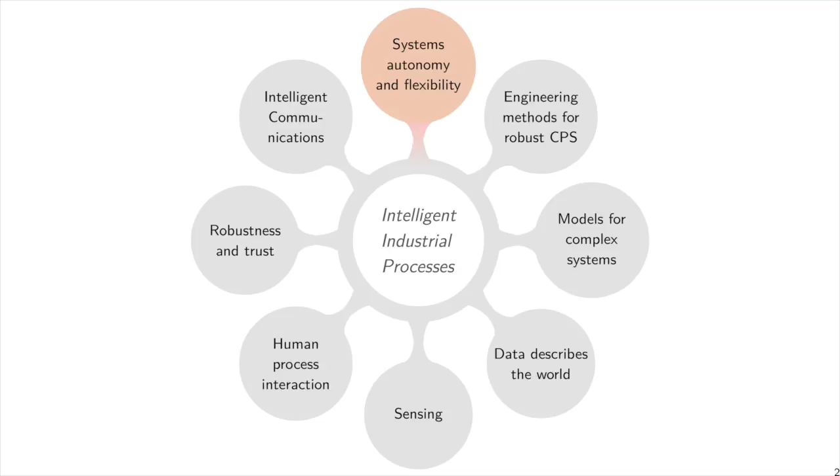Before I start, I would like to say that our system autonomy and flexibility theme is part of the larger theme at LTU, which is intelligent industrial processes. It's a theme working on connecting different aspects of daily life to improve the technology in industrial processes, to provide more robust, more secure, better and efficient industrial processes. The intelligent industrial processes, or as we call it, IIP, is itself part of a larger area of excellence at LTU in research and innovation, which has many parts and sub-themes, as you can see here.

Why do we need autonomous and flexible systems? Because in current life, things have become much more complicated. We have different systems, with a lot of intelligence distributed over them. We have smart cars, smartphones, a lot of things with intelligence built in. Our objective is how we can make all these components operate and work together for a better life. If we consider these complex systems interconnected all together, how can we bring a better understanding for human beings to get maximum benefit from these tools?

So what we are doing here, we mainly exploit the complexity of these things. These complex systems are getting more and more complex, and for that reason we need to be able to handle this complexity. This type of complexity is very difficult for humankind to understand or to integrate all together. So for that reason we have the autonomous and flexible system theme. Its focus is that systems can learn from operators. We need a methodology so that systems can operate and interact with each other and discover how they can operate in a better and more efficient way.

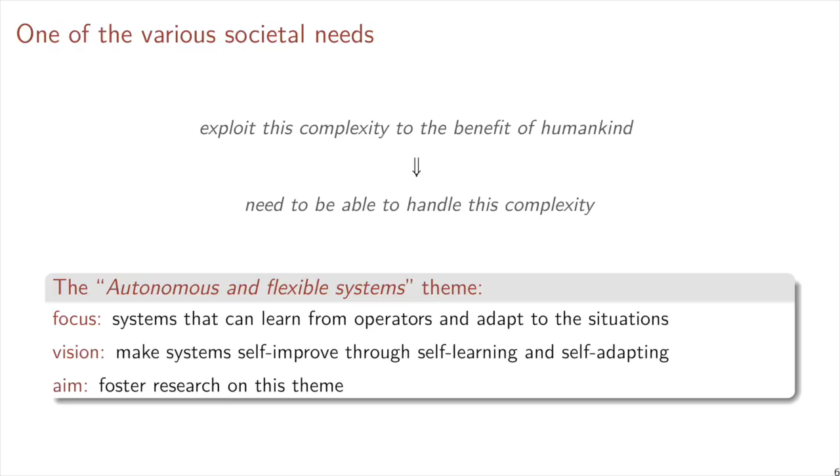The vision is that we don't need any human in the loop. That's our vision in the AutoFlex project. We need everything to be automated, and flexible when something is missing, something new is added, or new things arise. The aim is mainly to foster research on this theme. Now, I will hand the stage to Professor Cervantes to start presenting the main theme, which is called wide operating range of hydraulic turbines. Okay, thank you, Khalid.

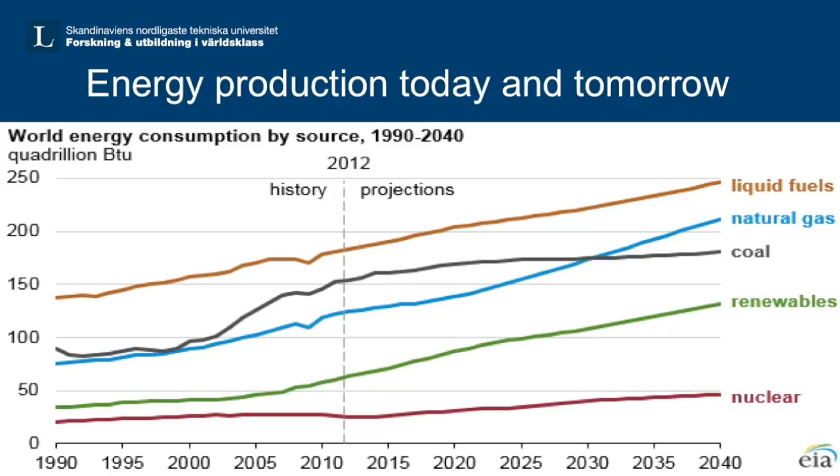If we look at 2012, you see liquid fuel, natural gas, and coal are widely used today. Renewable energy is one of the solutions instead of using such fossil fuels, and it's going to increase quite a lot. Today the main source of renewable energy is hydropower, which stands for about 71% of renewable energy.

Which type of renewable energy are we going to use in the future? Mainly wind and solar energy. Solar energy's price is decreasing very rapidly, and it's the same for wind. Today, in 60 countries around the world, solar energy is the cheapest energy you can get, cheaper than fossil fuel. In Sweden, solar energy is perhaps not widely used, but wind energy is increasing and getting momentum, and at times we get 10% of electricity production from wind.

Solar and wind have exponential growth. Here you can see, from 2000 to 2013, how the accumulated power for solar is increasing, and also for wind. This trend is going to keep increasing.

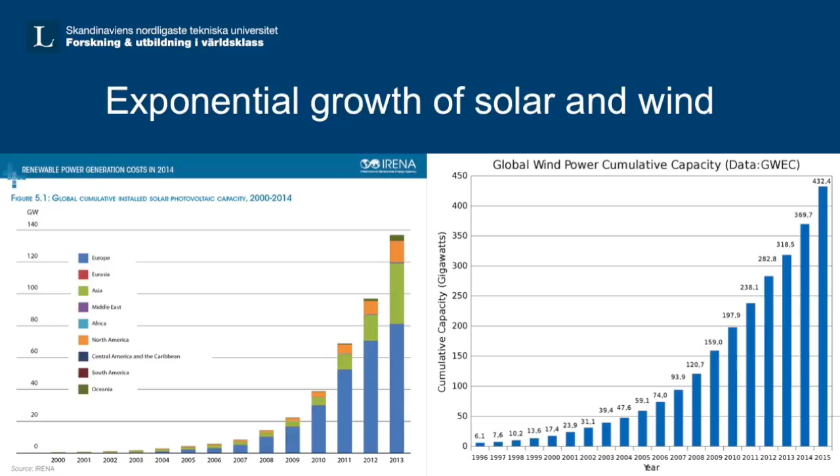One of the main problems with solar and wind is intermittent energy. If clouds appear, your solar panels won't produce electricity. If the wind stops blowing, you won't produce electricity. This means your system needs some backup able to respond to such variation due to the weather.

In Europe, one way to see the quality of electricity: we have production and demand, and we should have a frequency of about 50 Hertz, within a certain range. Here you can see some perturbation on the Swedish grid, where the frequency decreased really quickly. After that, you need to start some machine to regulate it.

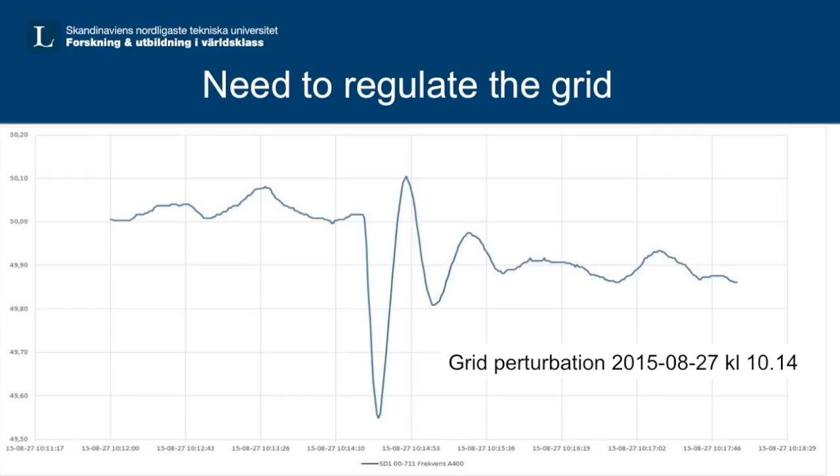In Sweden we are really lucky because we have a lot of hydropower. About 40 to 50% of electricity production is hydropower, and we think that in the future hydropower is going to have an increasing role, used more and more for regulation. Using hydropower to compensate for grid fluctuations due to renewable energy like solar and wind is an opportunity, because there's a large amount of hydropower already built in the world.

As I said, it's the largest renewable energy in the world, about 70%. In Sweden it's about 40 to 50% of electricity production. Here in Lulea, the Lulea River stands for about 10% of the total electricity production in Sweden.

Some words about hydropower and how it works. Usually you have a dam, which allows you to stock water and build a reservoir, like a battery. When you need energy, you use water which goes through the penstock and arrives at the turbine. The turbine is coupled to a generator with a shaft, putting the generator in motion to produce electricity. After that, the water leaves the turbine.

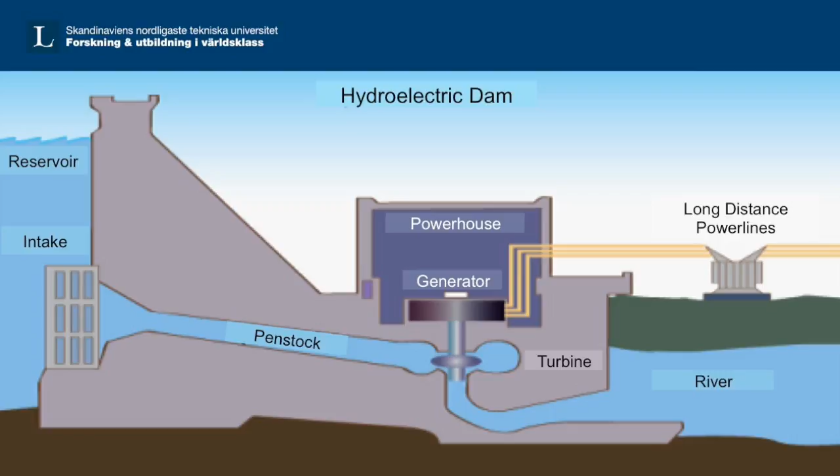Hydropower has been built and developed for many years. Today, hydropower is one of the most efficient ways to produce electricity. The efficiency of large hydraulic turbines is about 97%, and you have really large machines able to produce up to 700 megawatts of power.

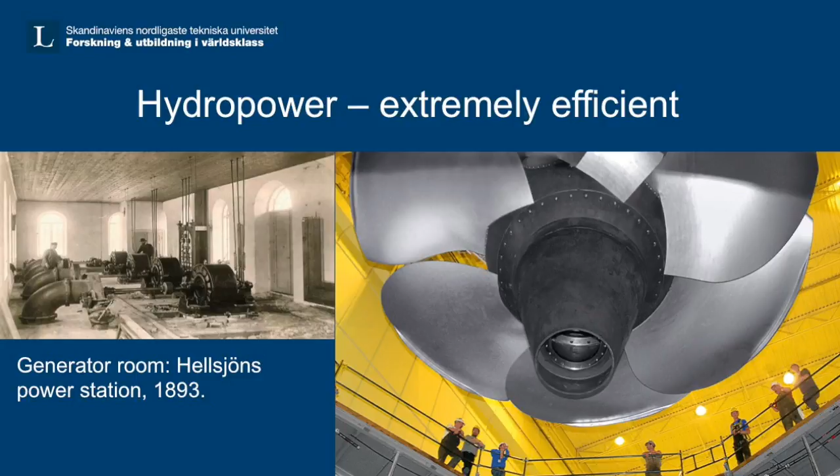Such machines have really large efficiency, but they are mainly built to operate at steady state, meaning they work with a given flow rate and give really good efficiency. As soon as we move away from this flow rate, the efficiency decreases and certain flow phenomena appear.

If we look at the introduction of renewable energy, like solar and wind, this creates perturbation on the grid. It means you are going to use your hydraulic turbines more often at part load or high load, and start and stop them more often. So you are using such machines away from the best efficiency, for which they are not really built.

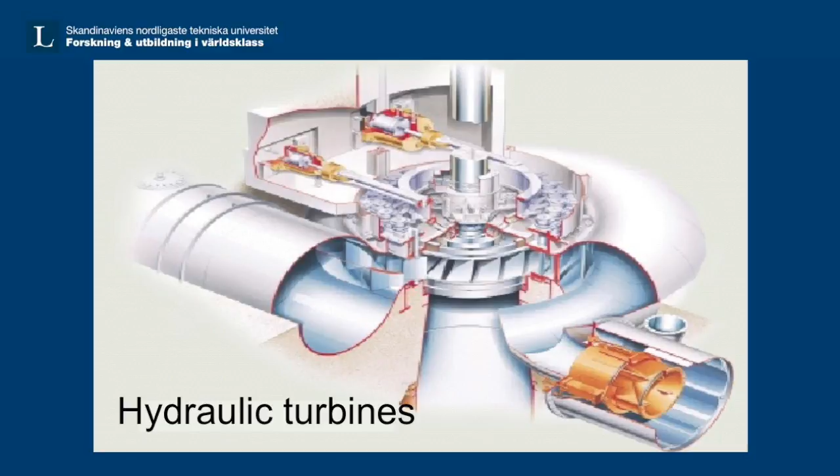The flow coming to the runner has a certain rotation, and after it leaves the runner. When you run the turbine at the best efficiency, the design point, the flow leaves the runner with a nice straight direction. When you move away from the best efficiency, some rotation is left at the outlet of your runner. This rotation in the fluid creates specific flow phenomena which generate pressure pulsation, which are not so beneficial for the machine.

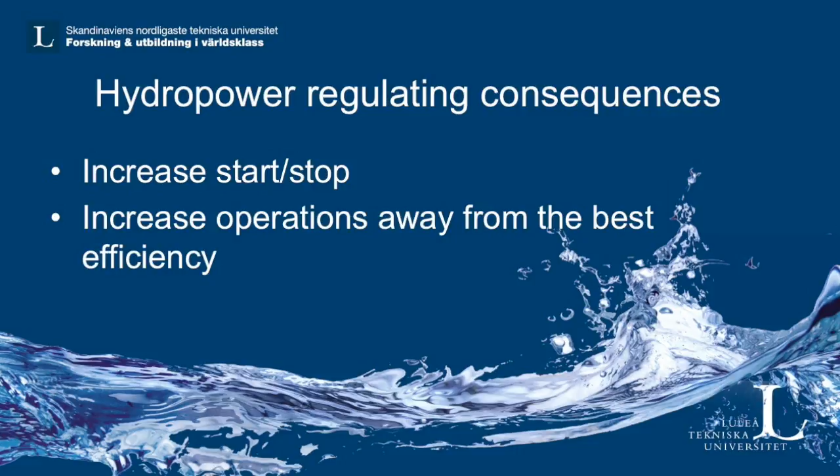If we use hydropower to regulate the grid, we increase the number of starts and stops, and we also increase the operation away from the best efficiency — so it's part load and high load.

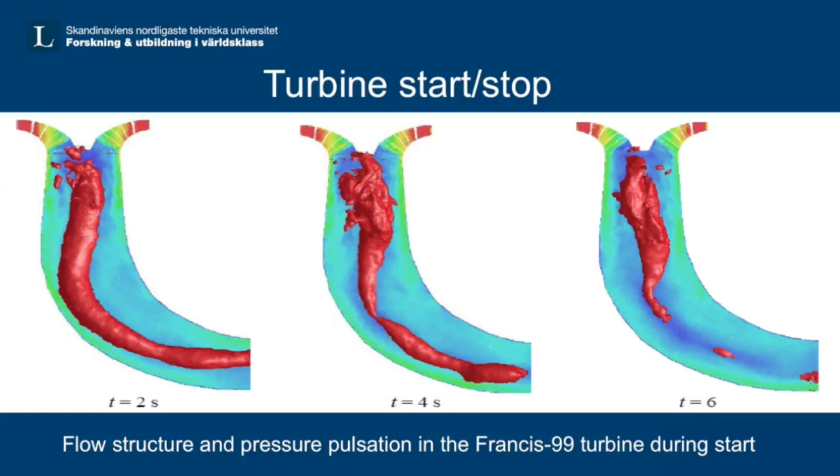If we look a little more in detail at what's happening in the machine when we start it, we see a large vortex developing just below the runner. It's like a snake, and this creates large fluctuation in the flow and vibration of the machine, which is extremely detrimental to the life of the machine itself.

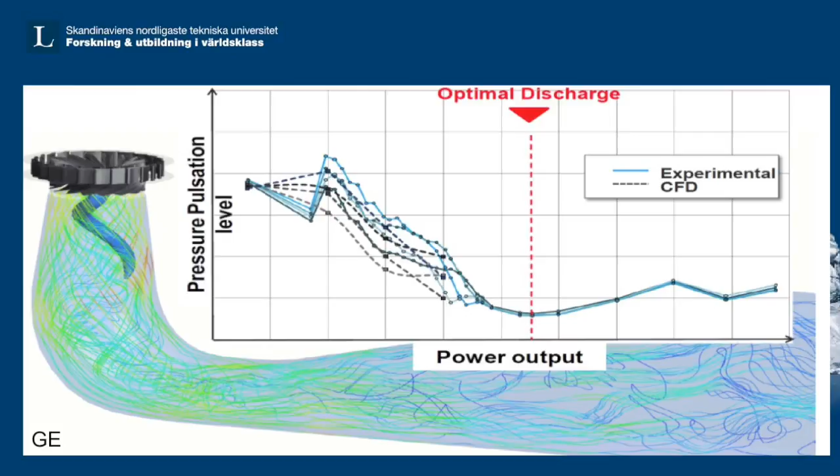There is a flow phenomenon which appears, known as vortex breakdown. When you increase the flow rate, pressure pulsation also starts to increase. All these pressure pulsations are due to the residual swirl, the rotation left in the liquid leaving the runner.

Now I'm going to show you some very nice pictures of what's happening. To the left, we see what's called a rotating vortex rope. In this case, the pressure is lowered, so we can visualize this vortex rope like a snake. It's low pressure, and you get some cavitation there. Just to the top, you have the runner.

This vortex rope is rotating, creating some circumferential pressure pulsation, but also some axial pressure pulsation, so it creates a lot of vibration. Such a vortex rope means some turbines cannot operate below perhaps 70% of the best flow rate. And when you go to higher flow rate, you get another type of vortex breakdown, which may create surge, so all the water in the complete water channel starts to oscillate.

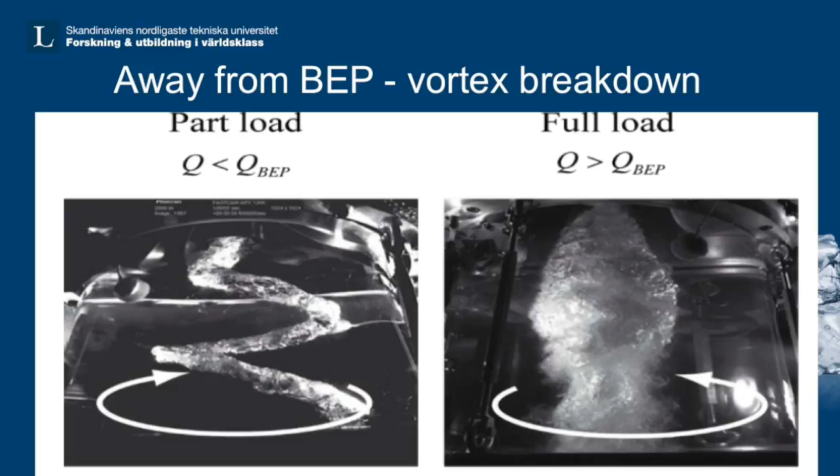This problem isn't really new. It's known since decades, dated even from the 1940s. There are papers talking about the Rheingans frequency, and a lot of measures have been tested, putting fins inside the draft tube, among other alternatives.

The one which is widely used is air injection. Here you can see a drawing of air injection on a machine in Romania. They have some tubes and they inject air inside the draft tube. The main idea is to decrease the pressure pulsation, the amplitude of the pressure pulsation in such type of machine.

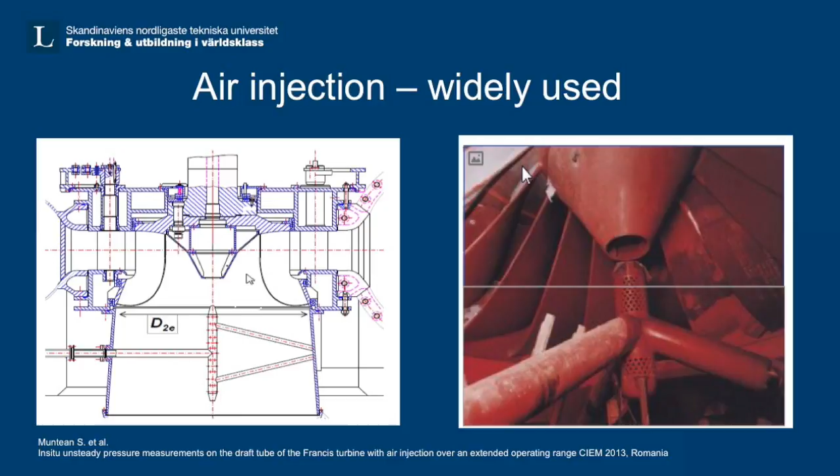There is some other way to inject air. It can be through the shaft itself also, so you don't have to have an element inside the draft tube.

Unfortunately, air injection is not always successful. Here you can see amplitude as a function of the frequency of this rotating vortex rope. What you need to focus on is the amplitude. In the figure on the left, you see an amplitude of about 0.5, due to the pressure pulsation of this vortex rope, and you want to decrease this amplitude.

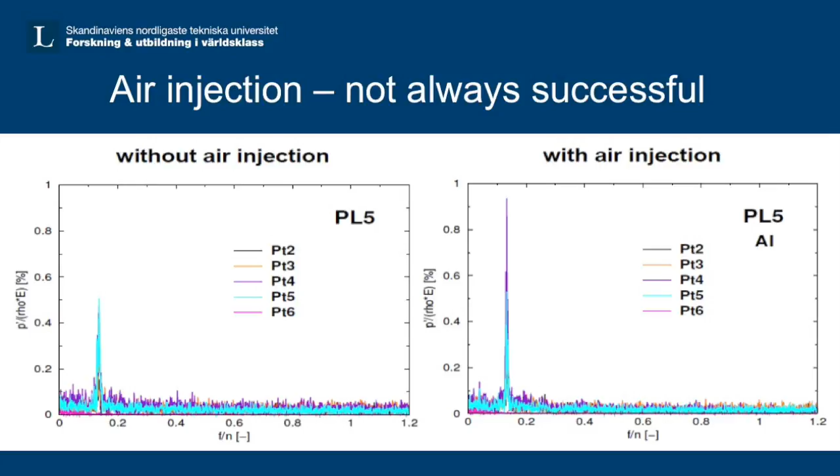So you inject some air, and in fact you can see that the peak increases to 0.9. What I want to point out is that air injection is not always a successful method to decrease the pressure pulsation of a rotating vortex rope in a draft tube.

This phenomenon which appears is the vortex breakdown, and it's something studied quite a lot by people working in fluid mechanics. If you look in the literature, you may find different types of vortex breakdown: the bubble form, the spiral tail form, and the spiral filament form. The bubble form is better for us, we get less pressure pulsation, so it's something we want to move towards.

There are different theories about the vortex breakdown, but there is no consensus. Some say it's a wave phenomenon, some say it's a 3D separation, some others lean towards instability, and some people are mixing these different theories.

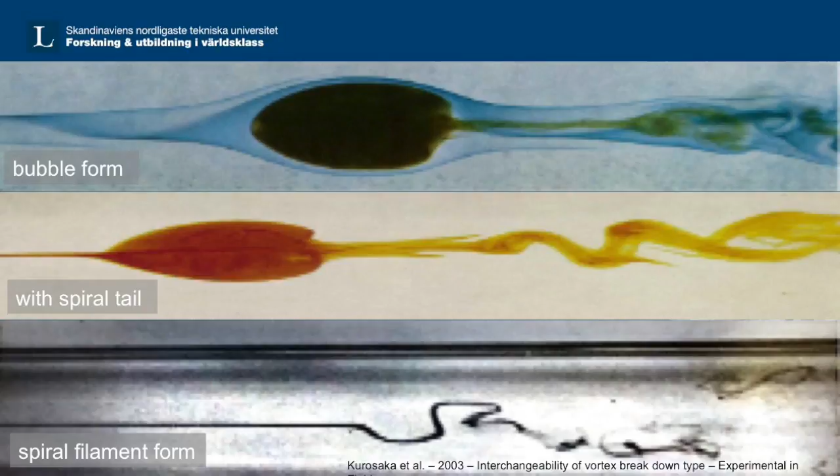One researcher investigated this vortex breakdown and created perturbations to move from one type of vortex to another. He was able to move from the spiral filament vortex to the bubble vortex breakdown, which is exactly what we'd like to do in hydraulic turbines—get rid of this spiral vortex, this rotating vortex rope. He did experiments by creating this type of circumferential perturbation.

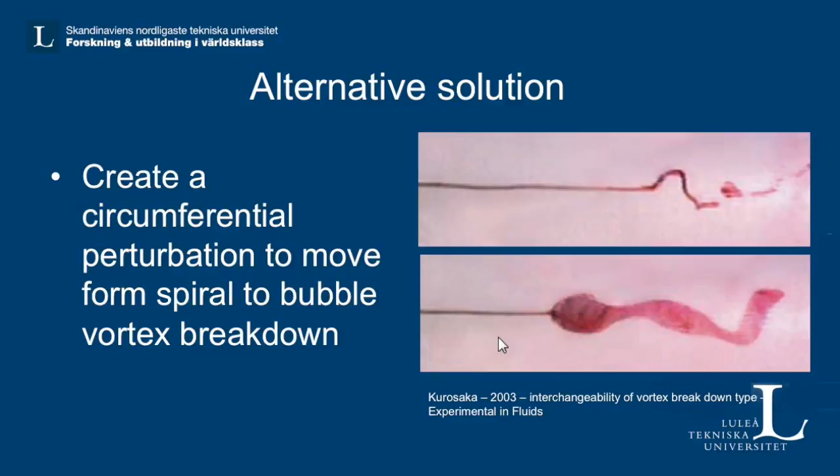The project, partially financed through this area of excellence, aims to investigate this alternative for hydraulic turbines. What we're going to do is create a circumferential perturbation to move from a spiral vortex breakdown to a bubble vortex breakdown. Here you can see these two pictures showing the bubble vortex breakdown and the spiral vortex breakdown.

Looking a little more in detail, in the figure on the left you can see a runner—this is a numerical simulation that has been performed. You see the green snake, which is this rotating vortex rope. After a certain plane, we're going to create perturbation with some linear motors. Here you can see a picture on the right showing how these perturbations are introduced into the system—we may create perturbation with different amplitude, different frequency, with some phase shift, and so on.

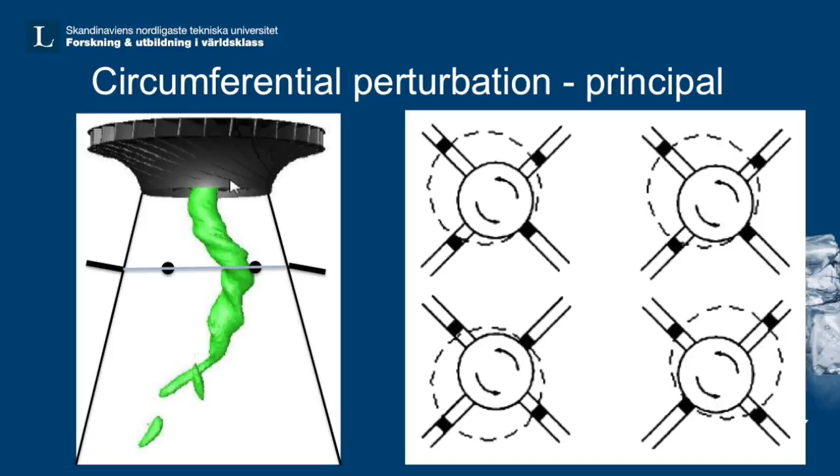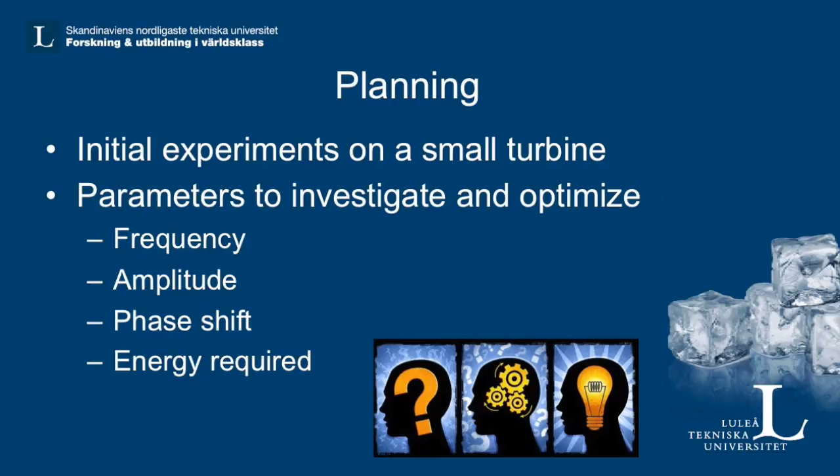Looking at the plan for what we expect to do, we're going to start with a small turbine at the university with small diameters, just to investigate the phenomena and its applicability to hydraulic turbines. There is a large number of parameters to investigate, such as the frequency, the amplitude, the form of the perturbation, the phase shift between these different cylinders, and so on. Of course, we want to move from the spiral vortex breakdown to the bubble vortex breakdown with a minimum amount of energy, so some optimization is needed.

And here, in this case, it's Khalid who is coming.

Hello again. So we conclude here, we have a problem that if we try to control it, sometimes we make it worse—right, by air injection. It's a good solution, but sometimes you can make it worse, actually. So we need to know how to do that, and usually this will lead us to optimization. This is our area, actually.

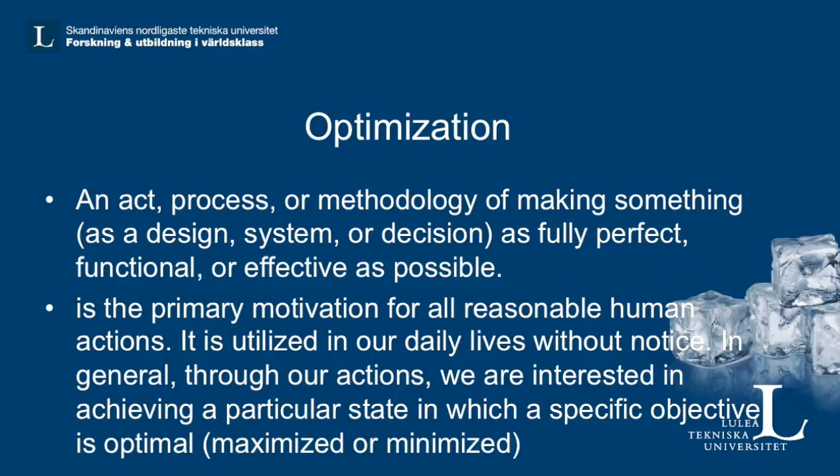What is optimization? Optimization is something built into our actual DNA as humans. If I go to my office, I will take the shortest distance, so I optimize to minimize the time. If I try to eat, I will eat the best food that makes me feel better sometimes.

Or sometimes the best food that makes me lose weight. Sometimes when I want to take the road, I will choose, for example, the minimum fuel, or sometimes I take the minimum time. Sometimes I take less traffic.

So it's an act that's built into our human action, actually. All our human actions are sometimes built around some objective that I want to achieve. Minimize energy, maximize comfort, minimize expenses. All these things are built actually into our DNA. Optimization is now well established in the world.

For example, as we say, we now have 97% efficiency in our turbines. What does efficiency mean? Of the hydropower entering the turbine, I will extract 97% of it at the output. But you can see previously the water wheel had 10% efficiency. So it's actually increasing over time. These things are design optimization. When I design the turbine, it's a pre-operation, I call it.

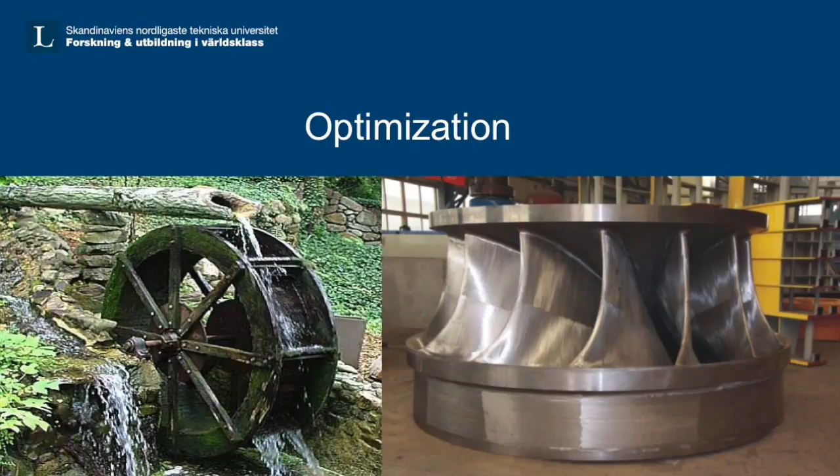But in real life, we need to do optimization online. For example, I drive with GPS, and the GPS is continuously calculating the optimal path. This is an optimization. In process control or automatic control, we have two types of optimization problems. For example, I know my comfort zone temperature. When I enter my room, I know for sure the temperature that feels best is 21. I will set it to 21.

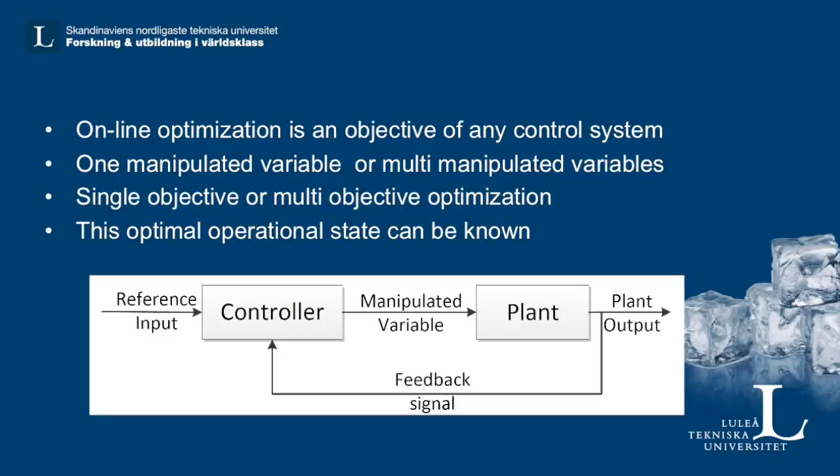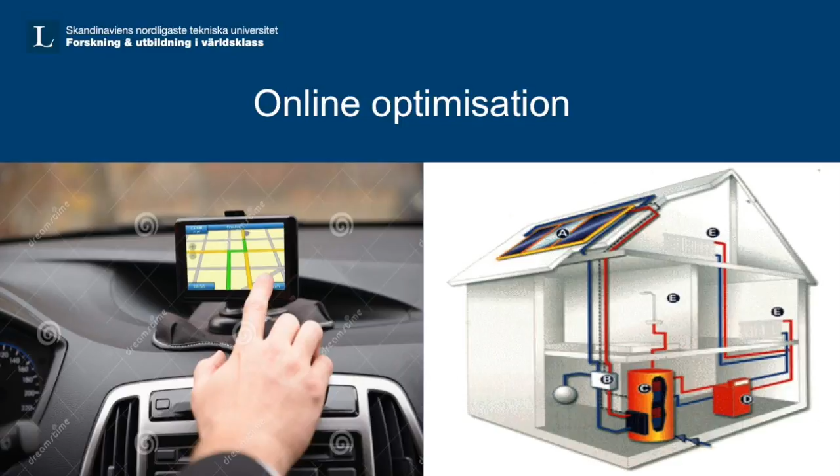So for that reason, as you saw here, I have a plant and I know the reference. I know the output that makes me comfortable. So I know the optimal operating point for the plant. And sometimes, for example, in the house, as I said, you set the temperature you need. You set the cold in your refrigerator. You have the set point that will achieve the optimality you're looking for. But in some other plants, you have no idea where that position is.

Let's take 40 years step back when we had these old radios. What we were doing, I was just continuously holding the knob of the radio and changing it until I heard the clearest signal. There were no bands like today, where I set it to FM 89.1 and get that channel. Previously, it was manual. So consider our problem. We don't know where the optimum is. I just seek to reach it. And this is what we have here.

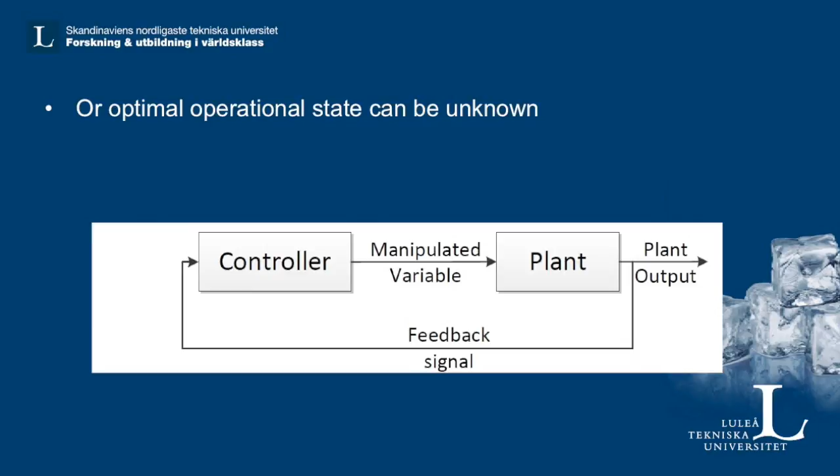We need a controller that will maximize, for example, the plant output until I hear the clearest signal in my ear. Like I will point my solar panel until it faces exactly the sun and try to track the sun, because there is no fixed position for the sun. If I don't have the right trajectory of the sun, I will start to seek it. And the controller will do that. This is our objective. We have a subject in control engineering called extremum seeking control.

Extremum seeking control is actually three words. Extremum, which is the greatest or minimum, the extrema, either maxima or minima. And seeking, we try to achieve it. We don't know what it is. We don't know the value of the maximum. We don't know how much I should steer my signal to reach the optimum. And control: we try to control the signal until it seeks and reaches this optimum.

So consider it this way. Now I'm talking about maximization. Consider a plant which has this nice shape. This is the relation between input and output, right? For example, in the radio, if you start to increase the position of the knob, you start to hear better, better, better, and then after a while it starts to degrade. So there is an optimal point. You don't know what it is, and you don't know the position of the knob that will achieve this optimum.

What the extremum seeking controller here actually does is try to achieve the maximum output without knowing it. How can that be achieved? From mathematics, we know there is the slope. With the knob, you start to perturb a little bit, and you see whether going left or right is better. Okay, if I go to the left, I will get more. So you insert a perturbation, and then you measure how much better it is.

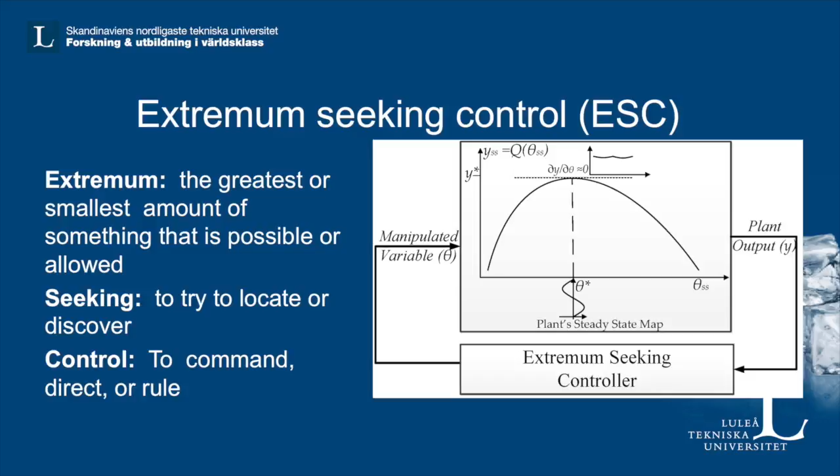And you start to increase, following the slope. So if you are below, it's better to go up. If you are switching and you feel the left is better, you start to increase and go to the left. So it's all about the gradient. Everything revolves around the gradient until you reach a point where increasing or decreasing, going left or right, will give you almost the same thing.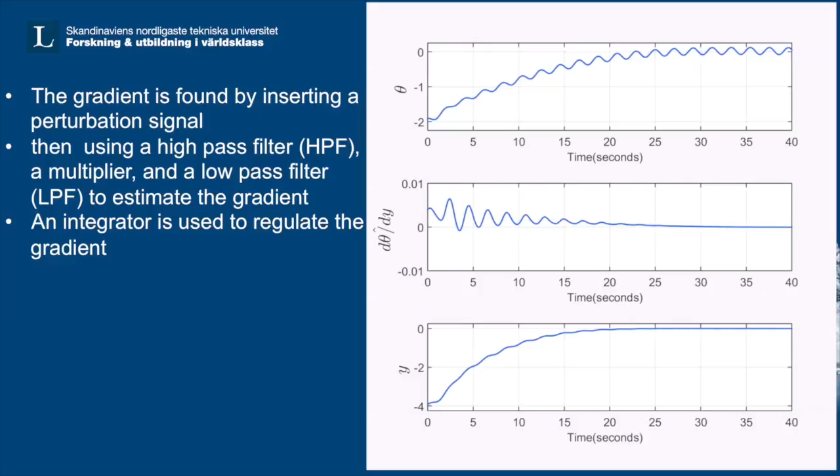And you can see when the output reaches the optimal, it stops. When it reaches the optimal, the system gradient actually reaches zero. And that means you reached the optimal. This is simply what you want to do to maximize or minimize things. The question now: this is theory, and most of the time we ask, is it applicable or not? We give one example here in a real problem.

Maximum power point tracking in a hydro turbine. When I have water coming through, I want to extract maximum power from it, right? So what we do, we try to adjust the turbine speed in small, micro or nano hydro turbines, which are small units that you put in a river or in your house, owned by people that have a river going through their places or some water source. We will try to get maximum power from this unit because the water will pass whether we like it or not. So all I need to do is increase the power extracted from that.

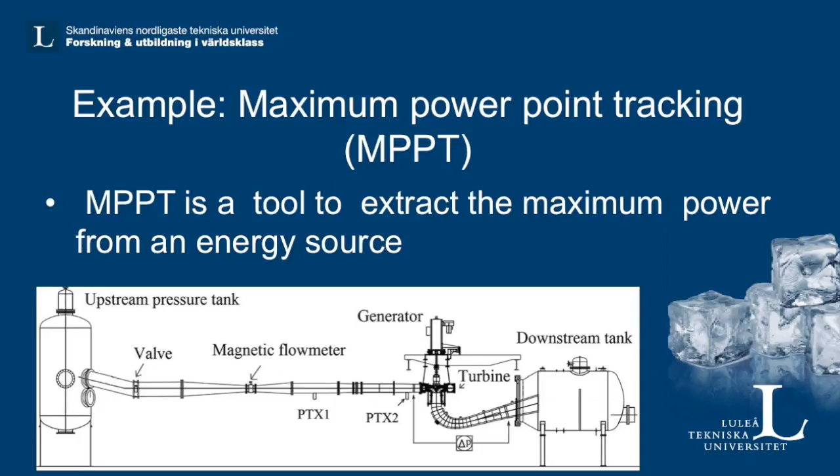And we can see here the example simply. This figure may be a little bit unclear, but the top side here actually is the turbine speed. The darker red area means you get more power. So we can see when the system started at a non-efficient point, the controller immediately moved to the red area. That means the system is going to have maximum power. And that's clear here in the lower figure.

You increase the power. The percentage of the power is very low, and the measurement is noisy. And that's good, because this is a realistic problem. We don't have the smooth sinusoidal or smooth measurement we have in simulation. So this is a real experiment, and the system can reach the optimal. And when we start very far from optimality, the controller immediately drives the system to the same red area, and it's clear here the power has converged.

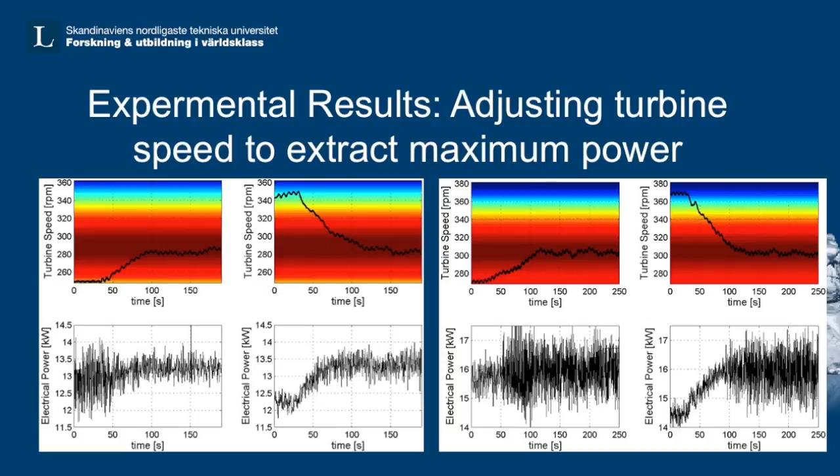This is another case when we have a sort of instability in the turbine. The turbine is not good actually, but the controller could drive the system to the optimal maximum power, even when you have very, very bad measurement. So in that slide, we prove this application is applicable. We can do that actually.

But what we want to do now is move to the real problem here. This is what Michel was saying previously. Sometimes you try to improve, but you don't know how. And those are the times that the air injection failed actually, because they tried to inject in an improper way. Instead of decreasing the pulsation, they put a wrong phase, wrong magnitude, wrong frequency, and that caused more deterioration to the system. They actually increased the problem.

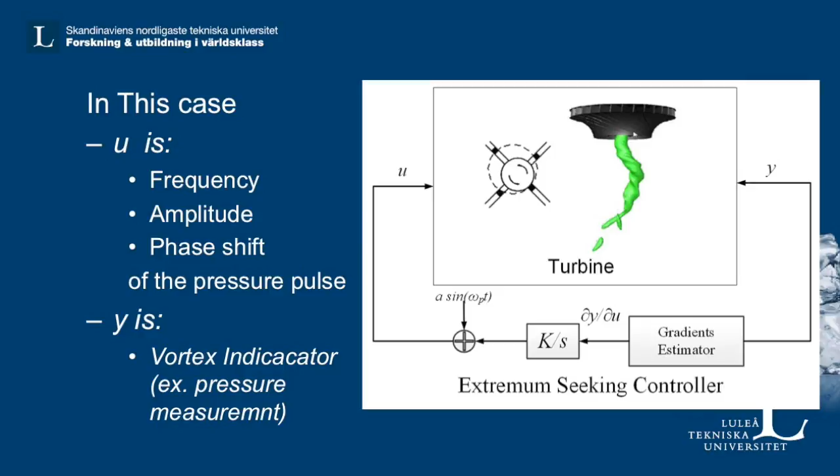And for that reason, we will have this technique that will be more or less a gradient estimator, and we will use the extremum seeking controller. In the case I showed earlier, we tried to maximize power. In this case, we will try to reduce the pulsation. So our measurement here will simply be the Y here. It's the vortex indicator. It's just an indicator, like pressure sensors or pulsation sensors, or if we go for small scale, we can use visual inspection or a lot of techniques. It's just an indicator of how wrong an operating point we have.

And what we will try to adjust here is the frequency, the amplitude and the phase shift of the system. And by that, we will be able to actually get rid of this red snake, as Michel called it. In general, we started at LTU in the lab to do this. We have a small test rig there, and we started to develop our own control system, and we hope we will have concrete results soon that will show how this can be done in a similar manner to the hydro power maximization. So it's the same problem. Instead of increasing your power, we simply need to minimize your energy, minimize your disturbance.

It's back now to Michel.

It's back to me, okay.

Yes, just to thank the people who are financing this project. So it's the area of excellence Intelligent Industrial Process, and we have also the Swedish Hydropower Center. In the Swedish Hydropower Center, you have all the industry working with hydropower, and it's partially financed also by Energimyndigheten. And in this center, you have Luleå University of Technology, KTH, Uppsala, and Chalmers also, which are involved.